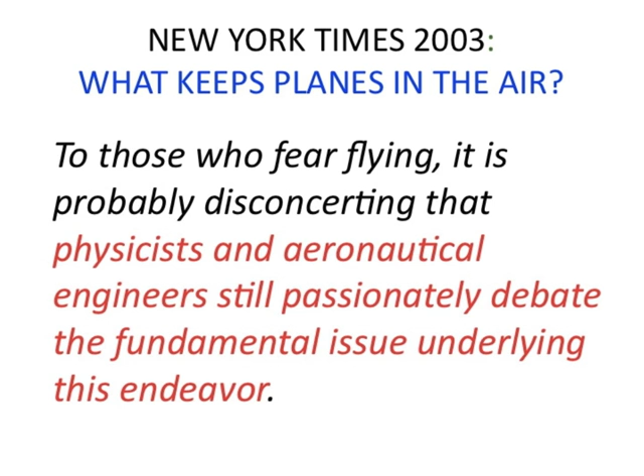What is needed is to explain the miracle of flight, which is how it is possible for the wings of an airplane to generate lift balancing gravity at the price of drag or resistance to motion through air, balanced by the thrust from the engines, with a lift-to-drag ratio L/D at least 10, of size 20 for an Airbus and up to 70 for a good glider, which means that it can glide 70 meters upon losing 1 meter in altitude.

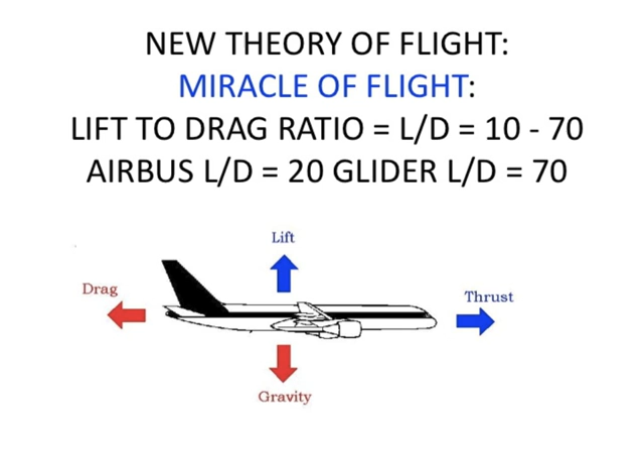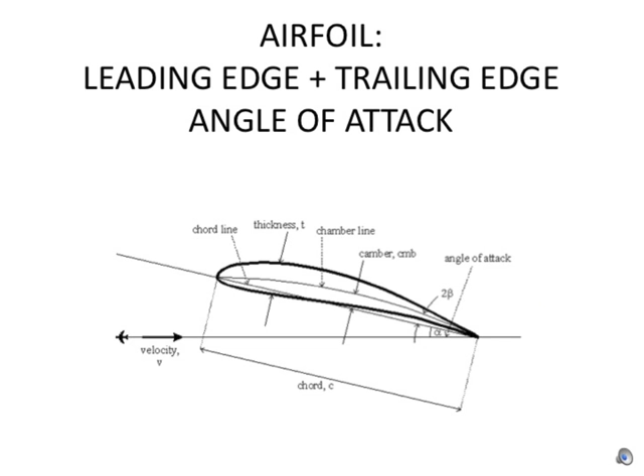A wing is an airfoil which generates lift as it moves horizontally through still air, here from right to left, with then the flow of air around the airfoil from left to right. Here is a section of a typical wing with a rounded leading edge to the left, where the incoming horizontal flow attaches to the surface of the wing, and the trailing edge to the right where the flow separates. The airfoil is tilted with a certain angle of attack, which makes the flow unsymmetrical.

Here is what you can see in a wind tunnel test, displaying the streamlines around a section of a wing under increasing angle of attack until stall. We see the flow attaching at the leading edge, staying attached on the upper surface, and leaving the trailing edge smoothly before stall. This is the flow we seek to understand, which means understanding the mathematics of the fluid mechanics. We shall see that the display of this experiment hides the secrets of flight. It is there, but you cannot see it.

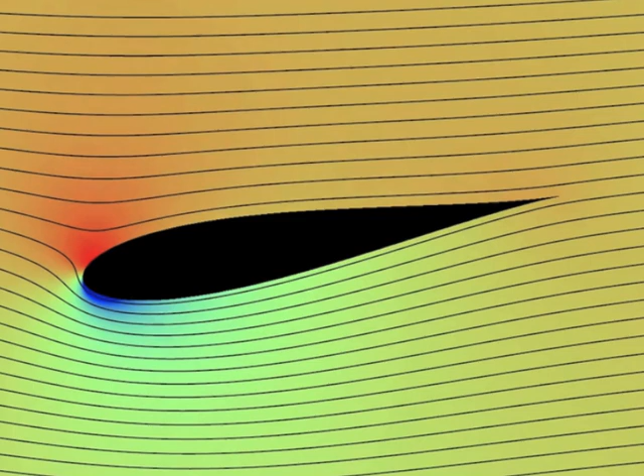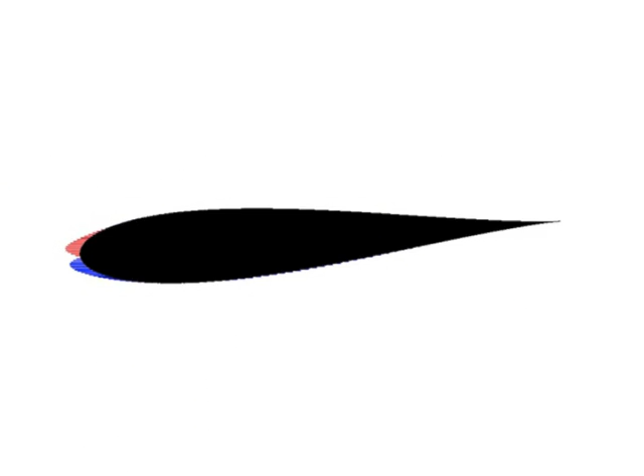Here we see the forces acting on the surface of the wing, with red high pressure and low pressure or suction under varying angle of attack, with the pressure rise and drop, peaking at the leading edge and dropping to zero at the background pressure at the trailing edge. We see separately the vertical lift forces and horizontal drag forces, with total lift much bigger than drag. We also see leading edge suction, helping to keep the drag small. Again, the 2D picture does not reveal the 3D secret to which we now turn.

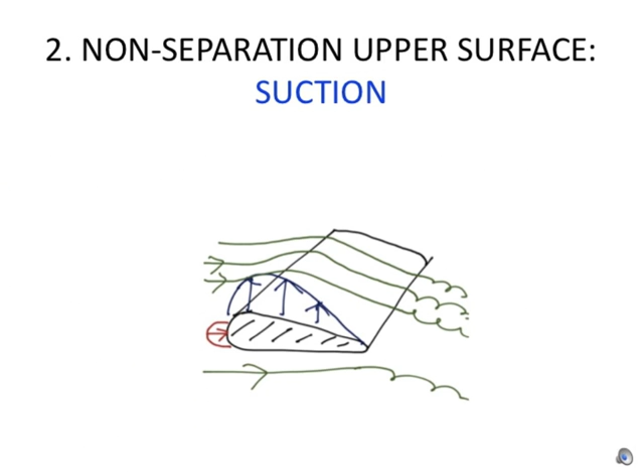This picture reveals the mechanism of the miracle of flight, consisting of 3 components. The first one is attachment of the flow at the leading edge under pressure rise, indicated in red, which generates drag. The second one is pressure drop or suction on the upper surface, indicated in blue, peaking on top of the leading edge and then dropping to zero suction at the trailing edge. The suction generates lift.

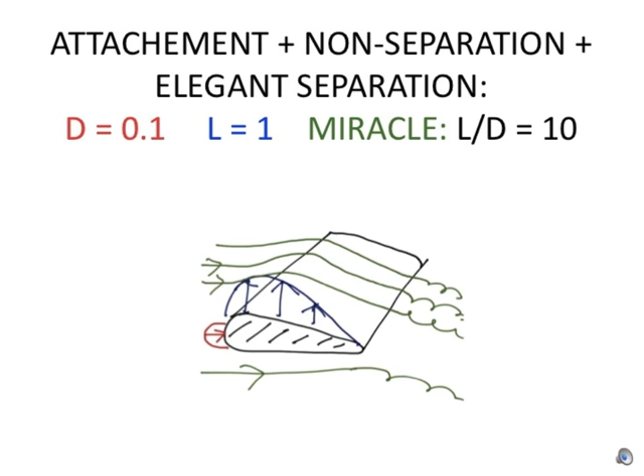The third one is separation at the trailing edge without pressure rise or drop. Altogether, the blue area of lift is more than 10 times the red area of drag, resulting in an L/D bigger than 10. The first 2 components will be understood from understanding classical potential flow as a simple, understandable form of flow satisfying Bernoulli's law, while the third is the critical new element of the new theory, referred to as 3D non-potential rotational separation, or in short, elegant separation, as it reminds of the swirling departure gesture practiced in royal courts.

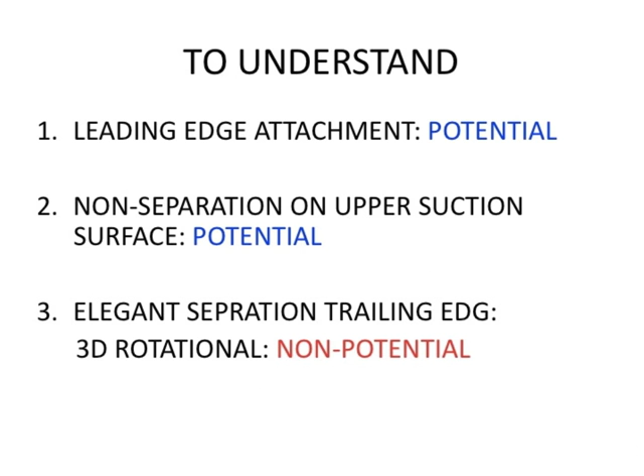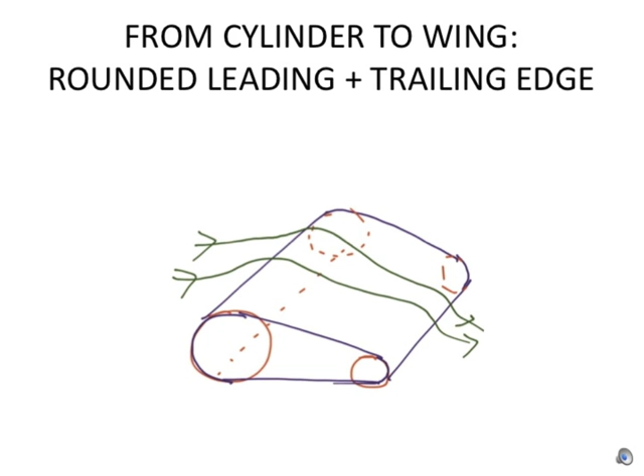We shall understand the flow around a wing by first understanding the flow around a circular cylinder, with the wing sharing the leading edge with the frontal half of the cylinder and the trailing edge with the rear half of the cylinder. One can also think of a wing as a sort of half cylinder generating lift.

We note that the real wing has a smoothly rounded trailing edge and not the sharp trailing edge required by the circulation theory of lift by Kutta and Zhukovsky, the most advanced theory presented in textbooks, which we refer to as the old theory. The fact that the trailing edge is rounded is an important aspect of the new theory.

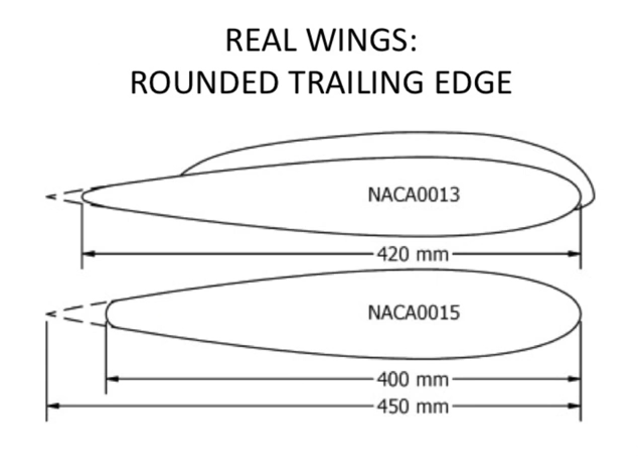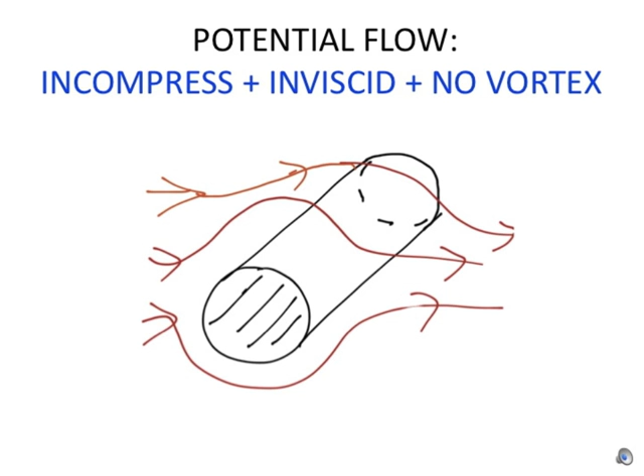We now start our analysis by considering potential flow around a circular cylinder as stationary, incompressible, inviscid, irrotational, that is non-swirling flow, which is a possible flow of air at speeds well below the speed of sound of relevance for birds, propeller planes and jet planes at start and landing.

We see here a section through potential flow around a circular cylinder with high pressure in red at the attachment in the front, low pressure on top and bottom, and equal high pressure at the separation in the back, resulting in zero drag and zero lift.

The flow satisfies Bernoulli's law with high velocity on top and bottom, where the pressure is low, and low velocity at stagnation in the front and back, with high pressure. The maximal suction on top turns out to be 3 times as big as the high pressure in the front, with a total lift on top about 10 times the drag by frontal pressure. We shall see that this is the desired L over D of size 10.

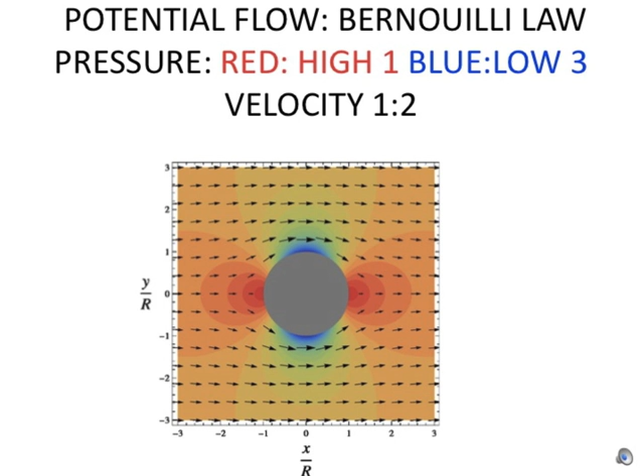But zero drag of a circular cylinder is not what is observed, and so there is something seriously wrong about potential flow, referred to as D'Alembert's paradox, formulated in 1752. The paradox was not solved until 2008, and when solved, revealed the secret of flight, as we shall now see.

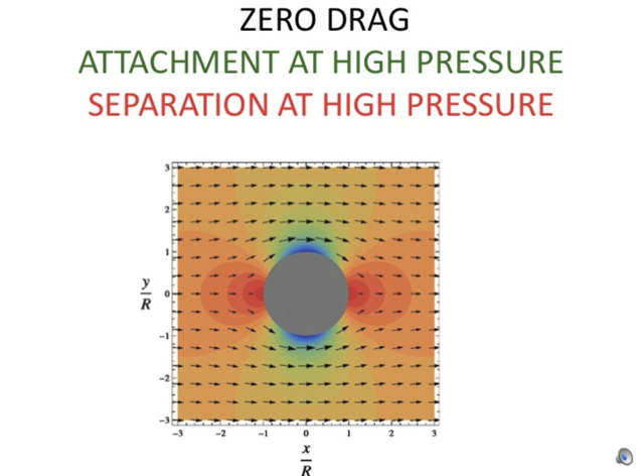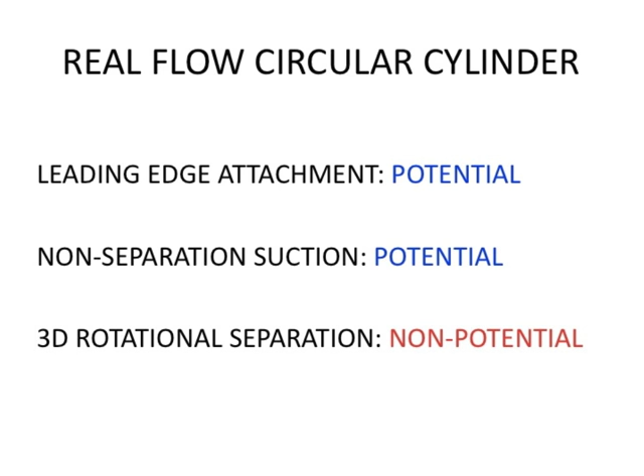The real flow around a circular cylinder is potential flow at attachment and all the way around the cylinder until separation in the back, where the flow is no longer potential, with separation at high pressure, but instead non-potential, with 3D rotational separation without pressure rise or drop, that is, with elegant separation, thus with drag from the high pressure in the front. In short, rear flow is potential flow modified by 3D rotational separation.

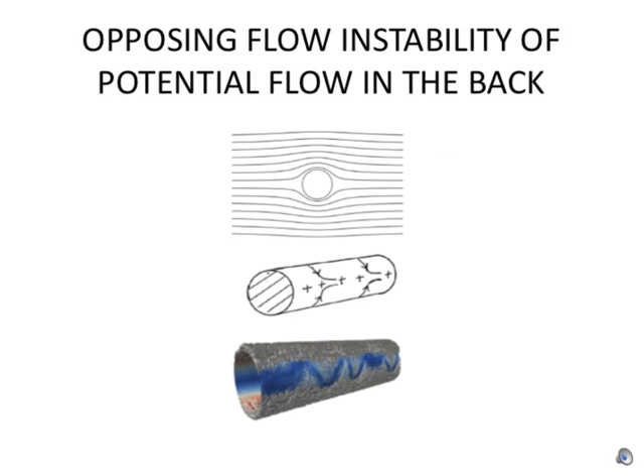On the other hand, the attachment is stable because the flow is retarded by the surface of the body and not by opposing flow. The oscillating velocity generates rotating flow with an oscillating pressure with zero mean, replacing the high pressure of potential flow.

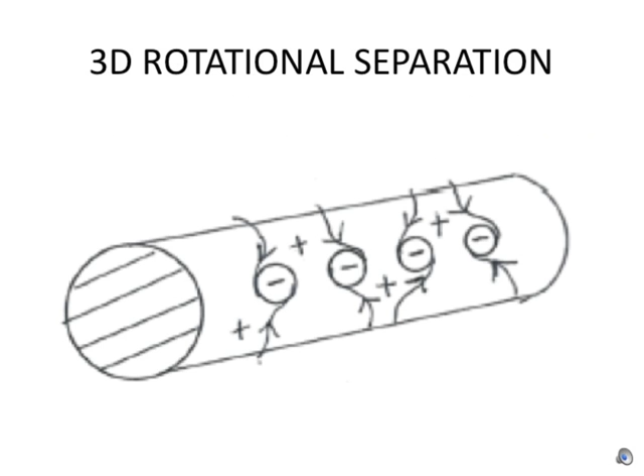This is 3D rotational separation as elegant separation without pressure rise or drop, established by counter-rotating rolls of swirling flow attaching to the back of the cylinder, thus forming a flow with drag from absence of the high pressure of zero drag potential flow. This is the resolution of D'Alembert's paradox by Hoffman and Johnson from 2008.

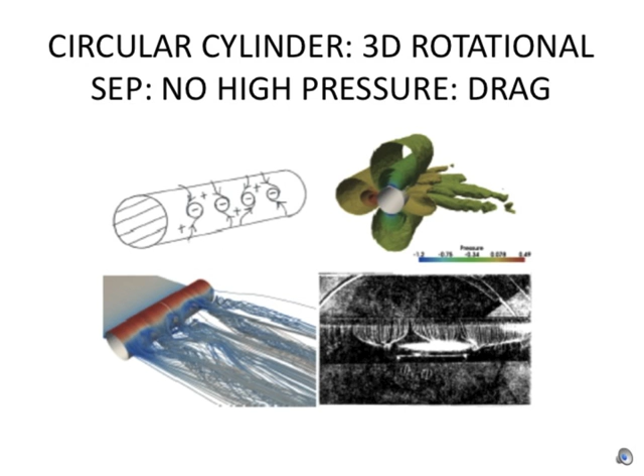Potential flow modified by 3D separation arising from a basic instability mechanism of opposing flow.

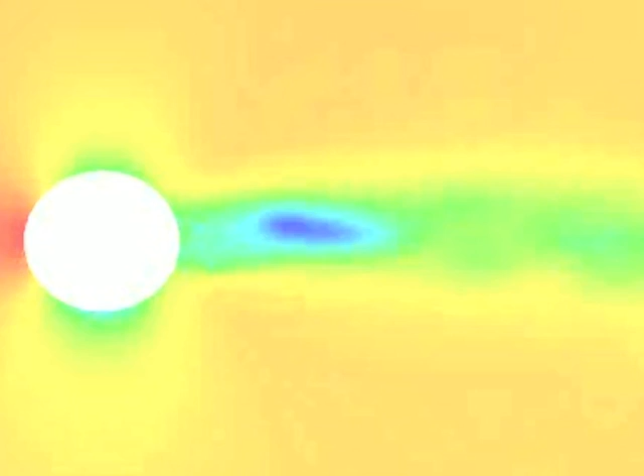In this clip, we see a section of a 3D computational simulation of the flow around a circular cylinder, starting from rest, first quickly establishing potential flow with high pressure in the back, and by instability developing into a flow with 3D rotational separation without pressure rise, and thus drag.

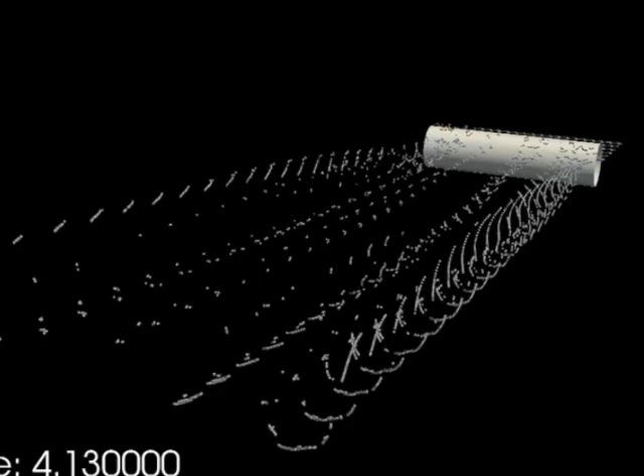Here we see the same thing viewed from above with the rolls of rotating flow attaching to the back of the cylinder, clearly visible. Here we see the array of counter-rotating rolls of swirling flow developing from the back surface of the cylinder as seen from a point further downstream.

From computational simulation, solving the Navier-Stokes equations with a slip boundary condition, making it possible to resolve the main features of the flow of importance to lift and drag.

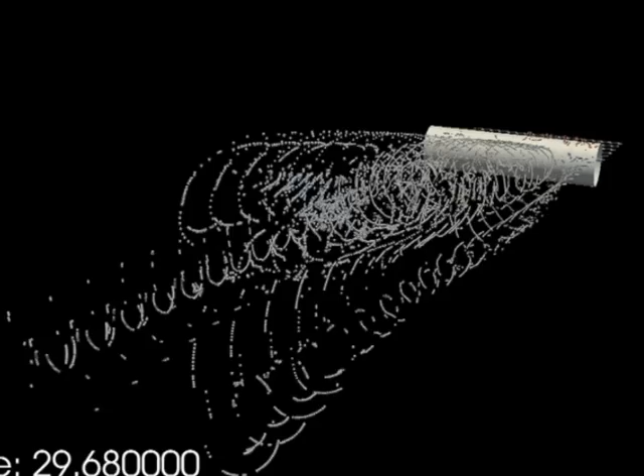We can now rationalize the picture we started out with as potential flow modified by 3D rotational separation at a rounded trailing edge, with suction on the upper surface peaking at the leading edge and dropping to zero at the trailing edge, thus generating lift at least 10 times bigger than the net drag from the high pressure at the leading edge. This is the secret of flight revealed by computation.

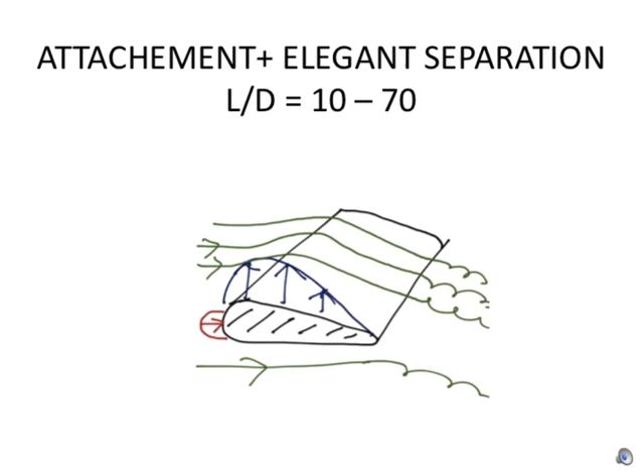Understanding now the basic mechanism of flight, we are ready to analyze computational simulation of the wind tunnel test we started out with. We see here a section of computed 3D flow around the wing under increasing angle of attack, with the wing here kept horizontal and the wind changing direction. First pressure and then velocity up to and beyond stall.

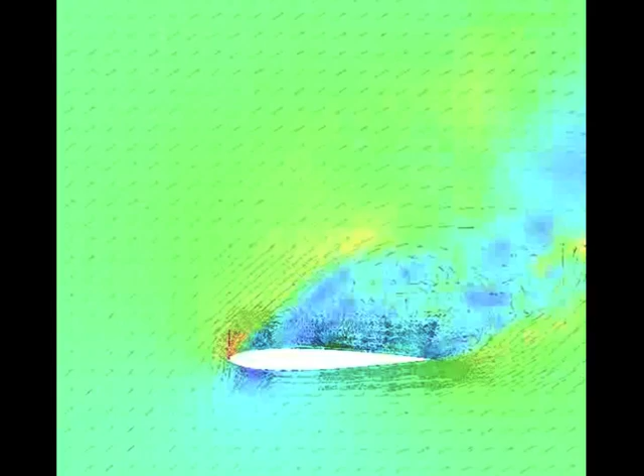We see here plots of computed velocity left and pressure right for an increasing angle of attack from 4 degrees to stall at 17 and beyond to 20. We see the 3D rotational separation at the trailing edge before stall and at stall separation on the upper surface before the trailing edge.

In conclusion, we have discovered the secret of flight by computational solution of the Navier-Stokes equations, which reveal a mechanism of 3D rotational separation, which has been hidden to inspection.